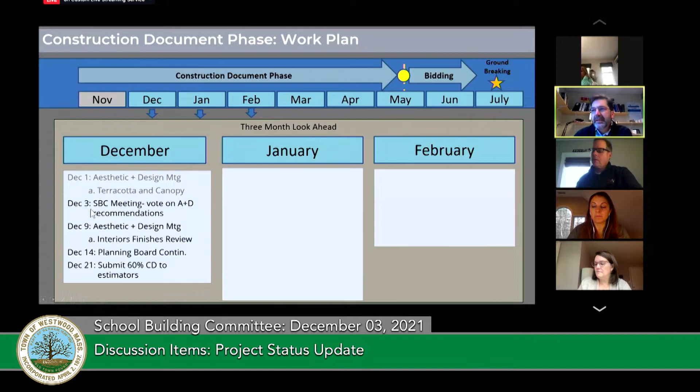Today's meeting—next week we've got another aesthetics and design meeting in person to review interior finishes. We'll bring in actual samples for discussion and review. December 14th is our planning board continuation hearing, and we'll be submitting updated drawings to them today for their review in preparation for that.

December 21st, we submit our 60% CD package to cost estimators. Then looking ahead to January, we'll be looking to begin to set up this room data sheet review and sign off, so that's something May and Emily should talk about and think about who wants to be part of that. This is kind of like circling back on each of the spaces in the building.

Some of the spaces are pretty straightforward, really haven't changed much, and might just need a cursory review. Other spaces we might have made some minor adjustments and have a little more discussion points to talk about, like the library for example. But this is getting into the next level of detail, looking at electrical outlets, locations, and placement of different things in the room, just making sure everyone is satisfied with where we're at before we go out to bid. So this will be the final review of that.

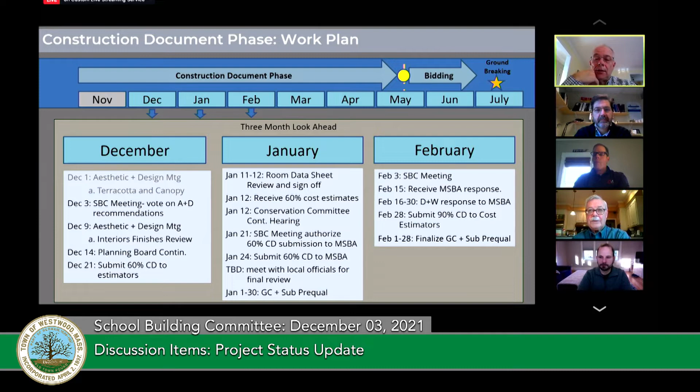We have one benefit, believe it or not, in the fact that we have a long site prep process with the ledge removal, which is not a supply chain issue. That would happen pretty much like normal economic times. So that buys us some time. So some of these things that have long lead times, we'll have that sort of built-in buffer in the beginning to buy us some time before we need it. But it's a big issue, and I'm sure we're going to be talking a lot more about that with this committee as we get closer to it.

Thank you. Tim, does the MSBA allow you to pre-buy things or secure things early? Because we also have the advantage of a large site. Is that something that could happen?

It's not the MSBA, but the statute allows for it, and we would encourage it—we're doing this on other projects—paying for material stored, that's called stored material. You have to make sure you have proper insurance and title transfers and all the things you need to protect it. In this case, we would really encourage, as much as possible, bringing things on site or putting them in warehouses, and we would want to pay for it once we check and make sure it is what it is.

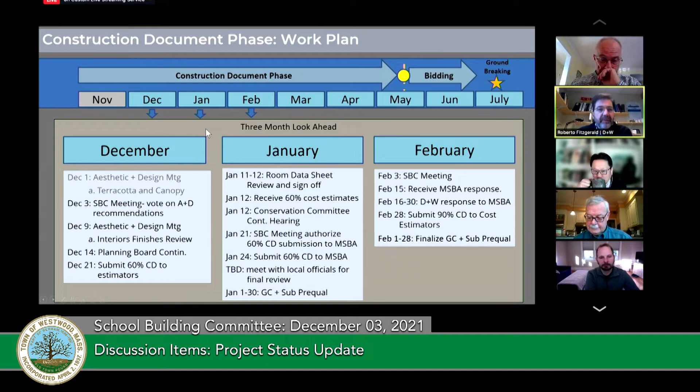Great. We'll continue on, and if anyone has any other comments or questions on that, we can certainly circle back.

So with the aesthetics and design subcommittee, we really wanted to get a handle on where the color range was that the committee is interested in. We used this building as an example, and ultimately the group came to a consensus. This sort of middle range was roughly the color range they were looking for—more brown rather than orange-red, this middle ground, not too bright, not too dark.

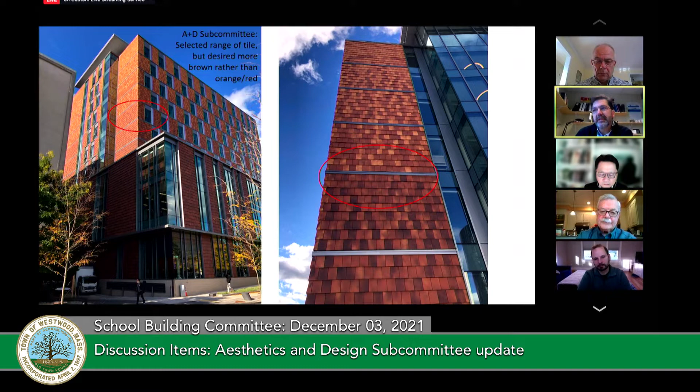Don't want it to be, excuse me, this dark brown color that kind of gets lost in the woods, as Brian said, but at the same time is bright and lively and inviting. So we laid out some of the samples outside and took a little walk out there to see the different samples that we brought.

This was the panel that we had shown months ago. We laid some of these different tiles up against the stone and gave thumbs up, thumbs down. Ultimately these three here were the range we were shooting for, and Dore + Whittier is given a little bit of leeway to continue to work with this sort of palette.

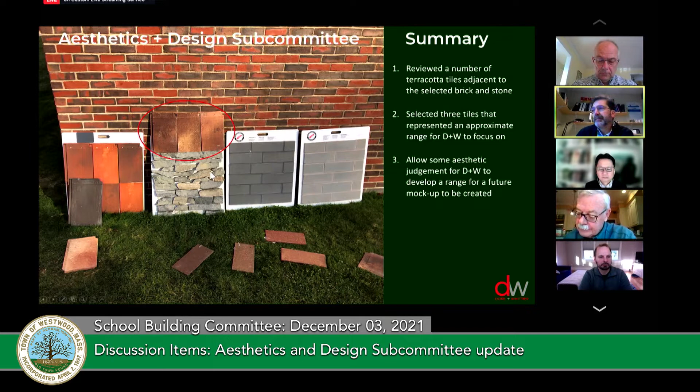We'll have a mock-up put up with a much larger selection of tiles to look at, compare, and fine tune before it actually gets installed. Ultimately this is our color palette here for exterior materials: the stone, the brick, and the terracotta.

Sorry, before we move on, does anyone have any comments about that from the SBC? I just want to make sure that everyone's on board. Okay, all right, thanks Rob.

There are a few more slides related to this. We looked at our current rendering, then a revision trying to make it a little bit darker, the darker brown with a narrow range of tile. Then this is a slightly broader range of tile, and this is ultimately what the subcommittee is more interested in as a general consensus.

As I mentioned, we don't want the building to get lost into the woods if too brown or if the range is too close. This allows for more variation with the range of tile, so you can see the effect from a distance. We'll use a mock-up to review as another opportunity prior to final acceptance.

Does anyone on the aesthetics and design subcommittee have any other comments? I was just wondering, Rob, can you check in that your team is in agreement with our input? We would rely on you to tell us if we're off.

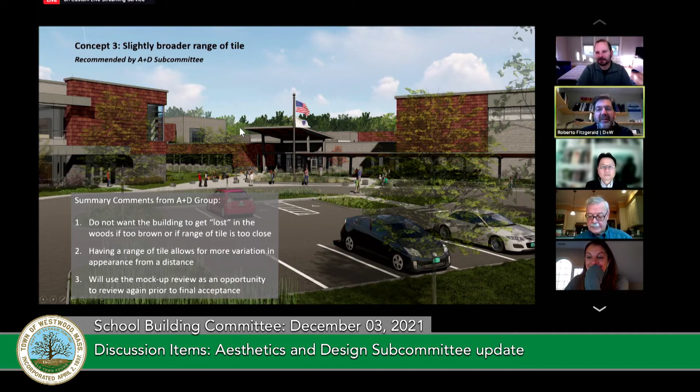Yeah, no, we are in agreement. I think this is a good selection, and with the ability to have a little bit of our professional judgment with the tiles when we get a larger mock-up put together, I think we're in a good spot.

The only thing I'll add for people that aren't on the committee is that what this looks like in sunlight is very different than what it looks like without sunlight. That was one thing we were a little bit challenged with, so we'll leave it somewhat to what you guys think as experts, given our guidance.

Thanks, Tony. This is one example - actually Tony had mentioned this when we were looking at it. If you look at the brick here, you've got some very dark brick. Up close, someone might say, is that going to be the color of our building? And then you look at others, so there's actually quite a range just in the high school brick.

But when you stand further back, a lot of that just kind of gets blended, and you don't really see that this is a super dark building. It's the same kind of idea, to have some variation in there to give it some texture and nuance.

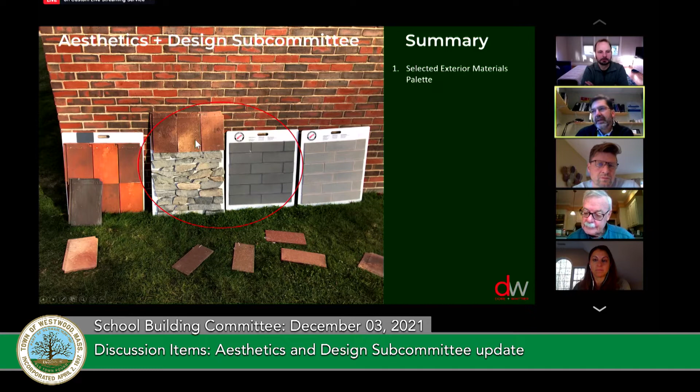The second item we talked about was the walkway canopy, and there were a couple of decisions around that. Very early on in some early renderings, we had a walkway canopy with a central column in the middle and some wood integrated into it. As the design development process continued and we needed to firm up the design for that canopy, we streamlined that and made it all tube steel column and beam, and moved it to offset.

At that time, it was like, well, can we circle back again and take another look at this decision a little bit more closely? So that's what we did, and these are the decisions we went through. This is the offset columns with the tube steel that we've been seeing in the renderings that we developed.

This is all the wood slats in the ceiling up above - Doug fir, typically used on exterior applications, a very durable wood that can be used outside. This was an alternative, which would have the wide flange beams with wood integrated into them. Ultimately, the group decided it made more sense to go with the tube steel, considering that the wood tends to deteriorate, age, and discolor over time, particularly portions exposed to the weather.

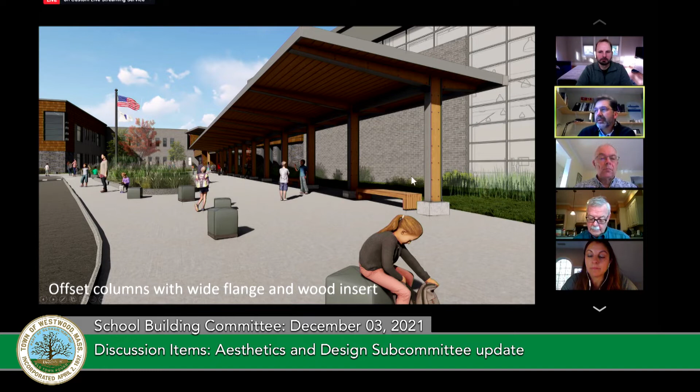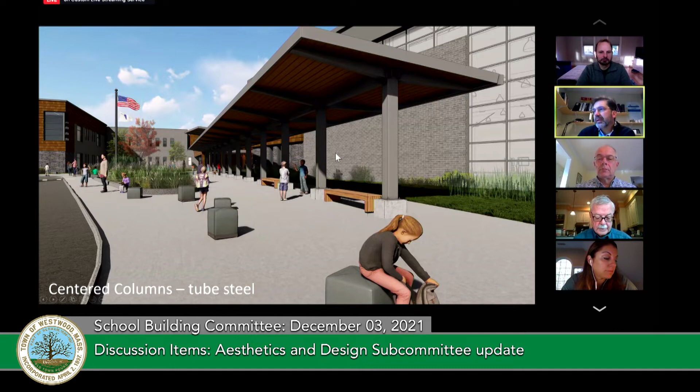We also looked at whether the column should be in the center or offset, and ultimately the group decided that they prefer the tube steel because of the concern with the discoloration and degradation. Retaining the wood at the underside of the roof deck still provides this warmth that's desired. The offset columns were preferred for ease of pedestrian travel and clearing in the wintertime.

We'd also like to have the columns set down below the slab so we don't have these concrete pedestals, and then apply an epoxy seal at the base. Ken had mentioned some concern with the concrete bases he's seen on other schools, where they've had to replace and patch them as they deteriorate. There would still be some maintenance needed for low portions of the columns, but sanding down and repainting is a much easier process than dealing with spalling concrete at the bases.

Any other discussion from the aesthetics and design subcommittee on any of that?

I think a lot of the decisions, for this one in particular, were based on operational considerations. We asked Ken what he thinks is easier for him operationally, and also Emily, regarding the teachers, students, and traffic flow. Ultimately, I think that's the large reason why these decisions were made. I'll just tag on for the larger group that this was pretty much consensus among everyone. There wasn't any disagreement.

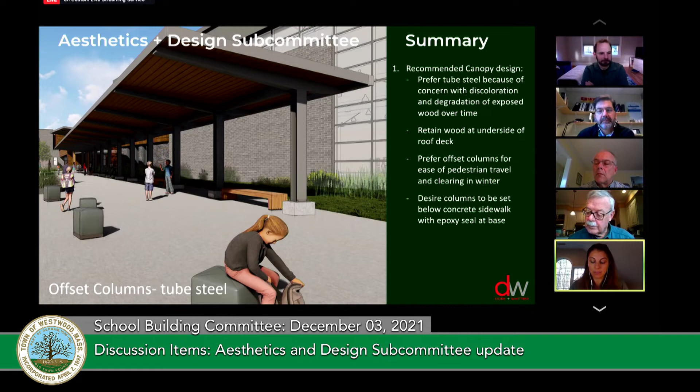Agreed. Does anyone from the SBC have any questions, comments, or thoughts on this? Okay, alright. So that's it from me. I don't know if there's anything else on the agenda.

So nothing under discussion. Rob, do we need to vote on this, or is it enough for the SBC to just sort of... I don't know. It wouldn't hurt to ask the SBC to accept the recommendations from the aesthetics and design subcommittee.